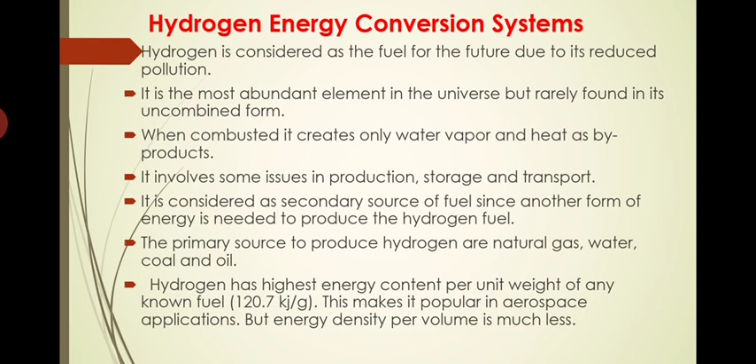So that's why it is not popularly being used. Of course, if some technologies are developed, liquefaction technology developed, it becomes easy. But energy density per volume is much less. See, if you burn a particular unit volume, then the energy released is much lesser. So that is the reason other fuels are dominant over hydrogen.

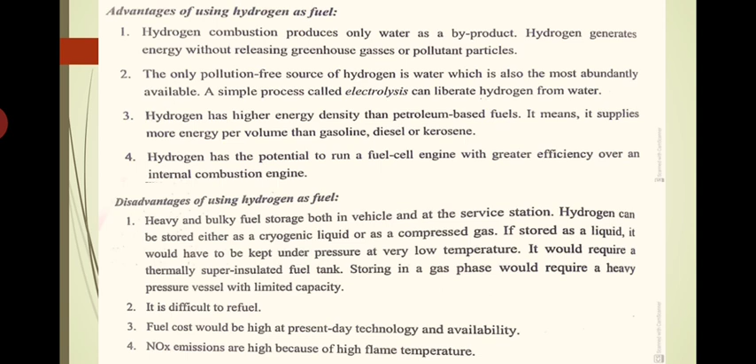Now in this slide, we will be discussing advantages and disadvantages of the hydrogen fuel. I think it is better you can read it. I will be sharing the slide with you, so please go through all these points. Advantages and disadvantages of using hydrogen fuel, it is discussed there.

Now coming to the hydrogen production methods. First important method is steam reforming, where there are various methods for producing the hydrogen. The one thing we can do is directly producing the hydrogen. If we are directly using it for burning purpose, then it is okay. If you want to store it, then only the problem is coming. So whenever we are using it as energy, just by producing, directly use it as the fuel. That is the only option.

So first hydrogen production method is steam reforming. Steam reforming is a hydrogen production process from natural gas. This method is currently the cheapest source of industrial hydrogen. Around 95% of the hydrogen required for industrial purposes is produced by steam reforming process only, and natural gas is used as the fuel from which hydrogen is actually produced by this method.

The process consists of heating the gas between 700 to 1100 degrees Celsius in the presence of steam and nickel catalyst. So actually natural gas is heated at around 700 to 1100 degrees Celsius in the presence of steam and nickel catalyst. Catalyst used is actually nickel, and along with that we will be using high temperature steam also. The resulting endothermic reaction breaks up the methane molecules and forms carbon monoxide and hydrogen. That is what is happening.

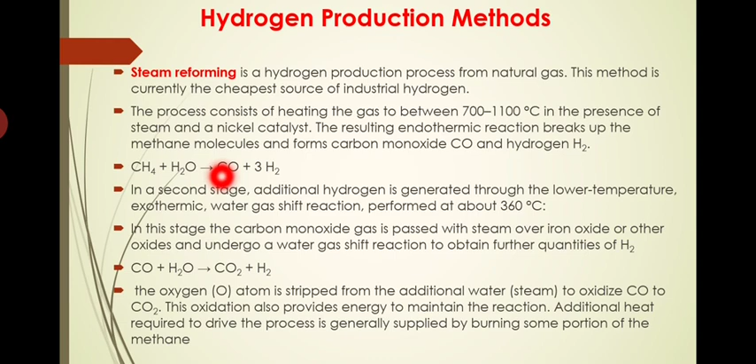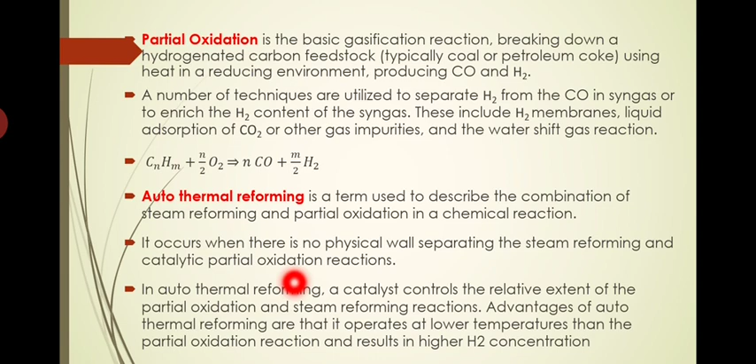In autothermal reforming, here we will have plenty of carbon monoxide as the byproduct by partial oxidation method. So that will be combining with oxygen in the next stage, or water shift reaction. So finally we can produce more hydrogen. That is what is happening in autothermal reforming process.

Now another important process for producing the hydrogen is electrolysis. It consists of using electricity to split water into hydrogen and oxygen. Now you will be remembering the reverse of this process that we have utilized in the case of fuel cell.

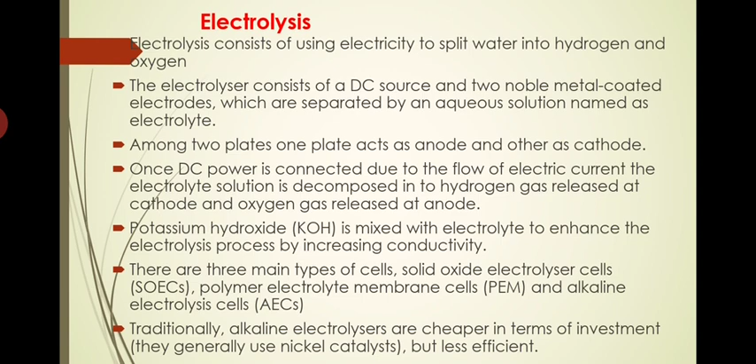PEM electrolysis, that means polymer electrolyte membrane cell electrolysis, are more expensive compared to the alkaline based one. They generally use expensive platinum group metals. The reason for the expense is they are using platinum group metal as the catalyst, but they are more efficient and can operate at higher current densities and can therefore be possibly cheaper if the hydrogen production is large enough.

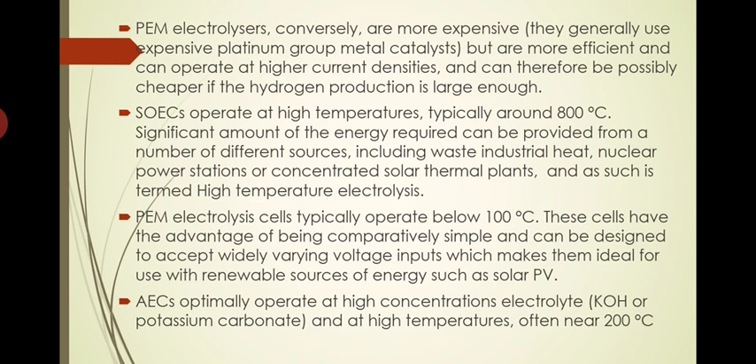Now coming to the hydrogen storage, I have already mentioned the major difficulty is storing of the hydrogen. Hydrogen storage is the main technological problem with the hydrogen economy due to its poor energy density per volume. See, per unit volume, if you are keeping it in the gaseous state itself, large volume is required to handle it. So per unit volume, if you burn, less energy only will be produced compared to other fuel.

Although per unit weight it is liberating much higher energy, hydrogen requires a large storage tank. Usually if it is stored in the gaseous form, it requires a large storage space.

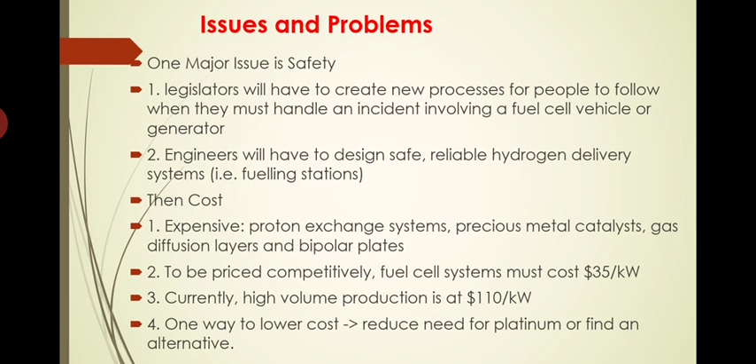Then comes the cost. Cost is another issue. Expensive proton exchange membranes, precious metal catalysts, gas diffusion layers, and bipolar plates. To be priced competitively, fuel cell systems. This much is the cost. So, of course, its cost is going to be much higher. One way to reduce the cost is reduce the need for platinum or find an alternative. See, instead of platinum, if you go for some other low cost catalyst metal, then we can reduce the cost.

Another is durability. Cell membranes must be durable and function at extreme temperatures. Cars start and stop frequently. It is important for the membrane to remain stable under cycling temperatures. All these are the problems with this one.

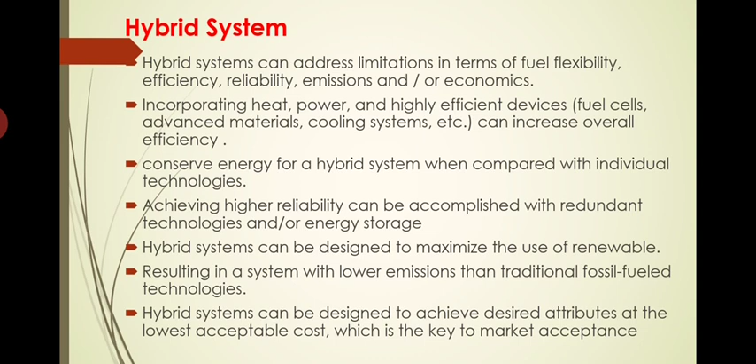The infrastructure: of course, I have told large structures are required since it is to be stored at high pressure, and leakage also is to be prevented. So that is all about hydrogen as a fuel.